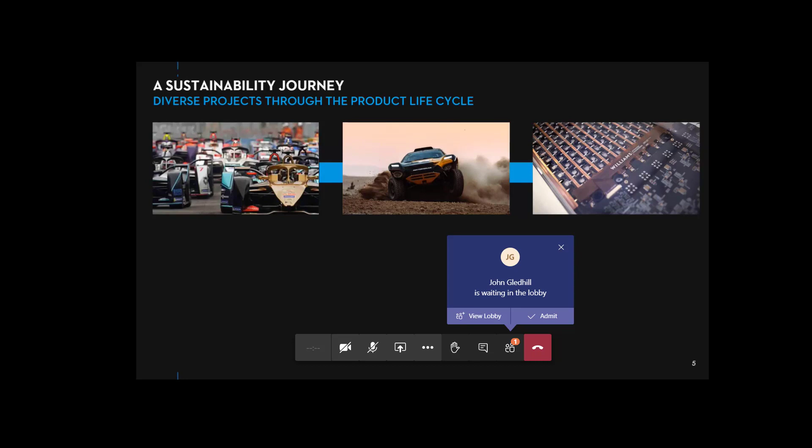We are also diversifying the battery systems into other markets. A couple of these being the Anglo-American mining product and also ocean-faring yachts. The battery pack in the mining product is well over 1,000 kilowatt hours in size for this fuel cell application.

Finally, reuse. Significant experience in repurposing automotive batteries. The example I'm showing here was a project that we did on the EU Horizon 2020 program, where we took Second Life Nissan Leaf batteries into a stationary energy storage application. Clearly, the charge and recharge requirements of an automotive battery far outweigh those for residential purposes, and therefore, once end of life in automotive battery usage happens, it can be utilised for future residential use.

So, sustainability. What does that really mean? We see that being used in many different factors, but it is fundamentally defined by the process of people maintaining change in a balanced environment in which the exploitation of resources, the direction of investments, the orientation of technology development, and the institutional change are all in harmony and enhance both current and future potential to meet human needs and aspirations.

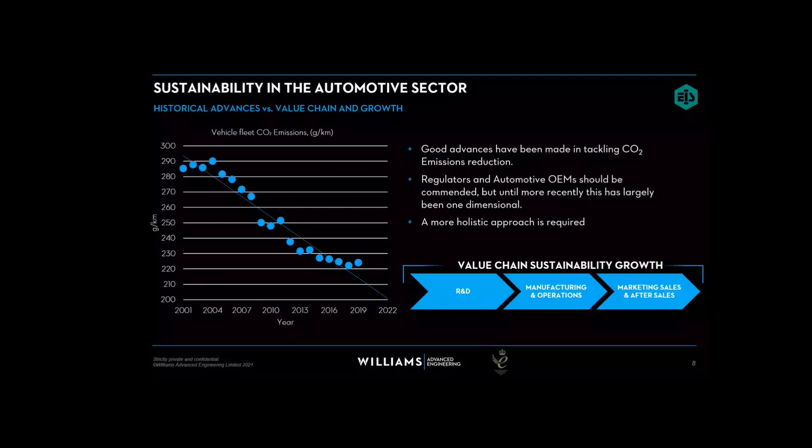So what's historically been happening? Well, I think historically the industry has generally been concentrating on tailpipe vehicle CO2 emissions. The chart shown is from the US EPA, and Europe is clearly a little bit better, but what I really wanted to illustrate here is that the industry has made some excellent advances in this time. However, to truly impact sustainability, a far more holistic approach is required. The whole value chain needs to be analysed to enable that sustainable growth across R&D, manufacturing operations, market, sales, and after sales.

So, at a high level, we can understand that there are many factors that contribute to sustainability within the automotive sector. It actually creates a circular economy that increases the overall value chain and growth. We should be mindful of any form of environmental impact on the resources that we utilise and minimise waste at any opportunity, whatever our function is within the automotive industry.

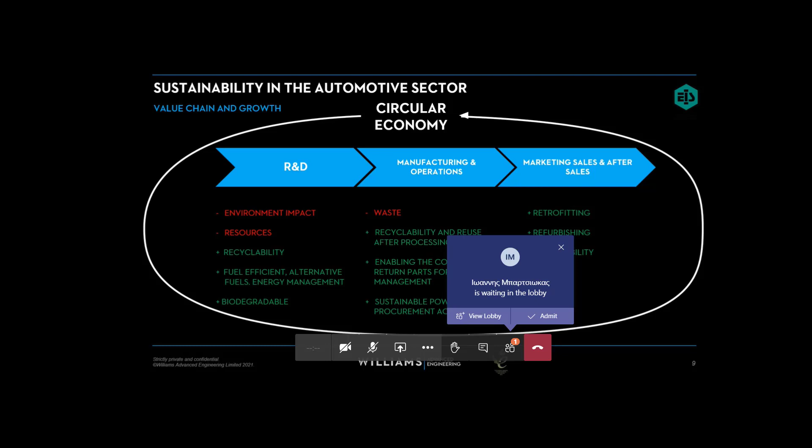Interestingly, I am fortunate enough to speak to a number of different OEMs, and I've seen a significant change in this mindset over the last 3 or 4 years. Some have been doing it for longer, but certainly in the last 3 or 4 years, there has been an acceleration in this approach.

Taking that top-down approach, there are already international standards for sustainable life cycle assessments. The question is, how does the automotive industry contribute across the design, materials, manufacturing, and use and end of life cycles? I've included a number of important midpoint factors to consider. This is just a mere snapshot. There are a huge amount more.

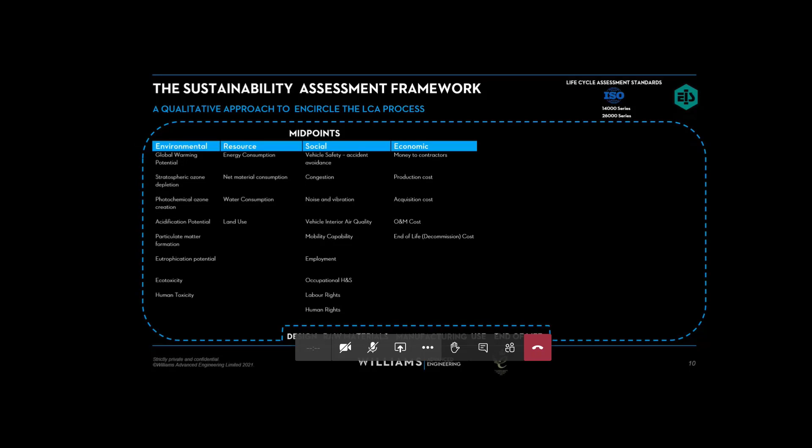The endpoints are clearly the outputs of any of our actions. The environmental, social, and economic benefits will be significant. One of the key things to note here, and I'll touch on this a little later, is the cross-pollination of our actions as engineers. If we design for one dimension only, it will always almost have a negative impact on another.

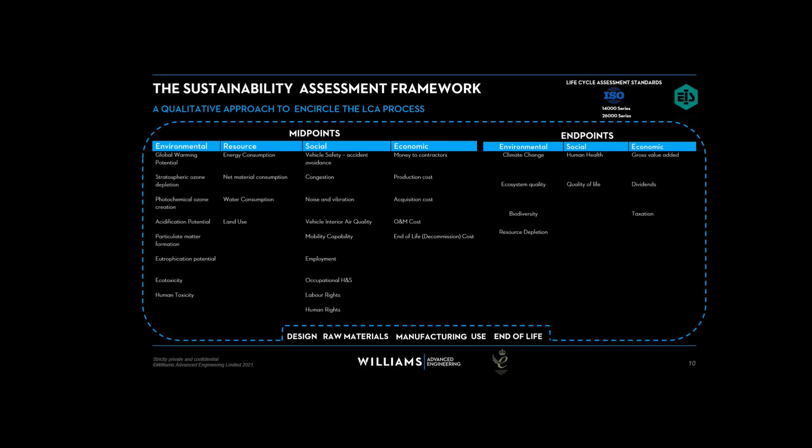So what is the industry doing? Well, if we look at the Advanced Propulsion Centre's technology roadmap for lightweight vehicle and powertrain structures, you can see a more holistic qualitative consideration being applied. Whether we are looking at design-led, materials-led, or manufacturing process-led, the considerations for sustainable life cycle analysis across those areas is being considered, rather than the historical cost, performance, and durability.

One thing to note, I'm not going to go into the detail of each one of these areas, but if you're not already utilising the excellent roadmaps from the Advanced Propulsion Centre or the Automotive Council, I recommend that you do go there because they are an excellent resource.

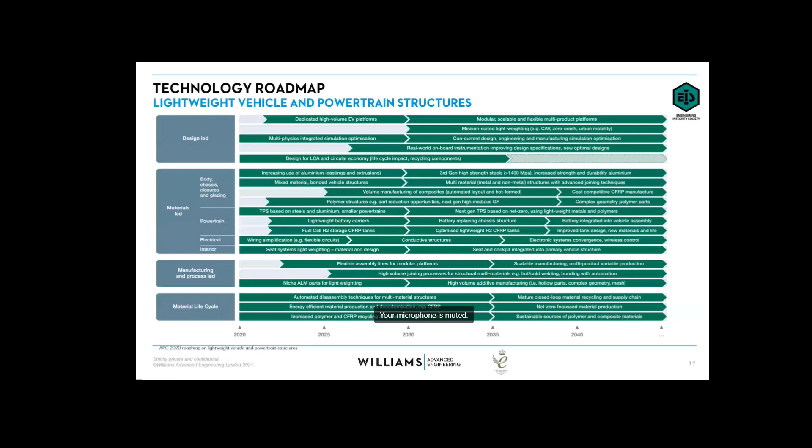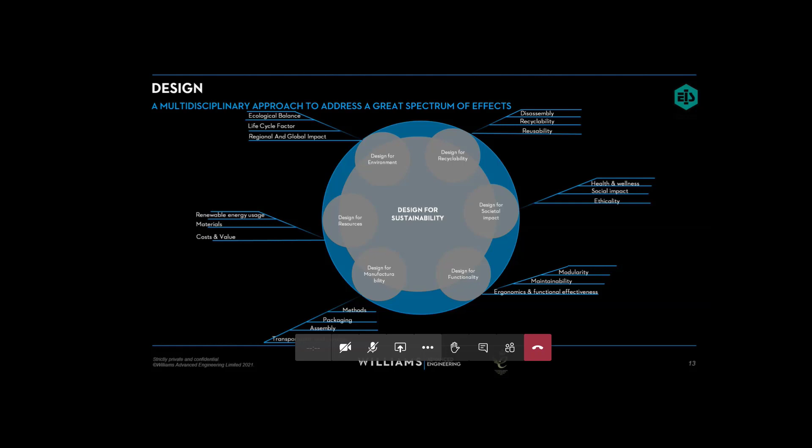So, some considerations for this holistic design for sustainability. As I mentioned, it is not just looking at those traditional cost, performance, reliability elements that engineers would historically design for. There needs to be a consideration across all of the main factors, not only from an environmental perspective, recyclability, social, functionality, manufacturing, and resources. As I mentioned, they are all intertwined and very important in terms of getting that right balance. As I mentioned before, most OEMs are starting to take this into account, and I'll touch on that a little bit later on.

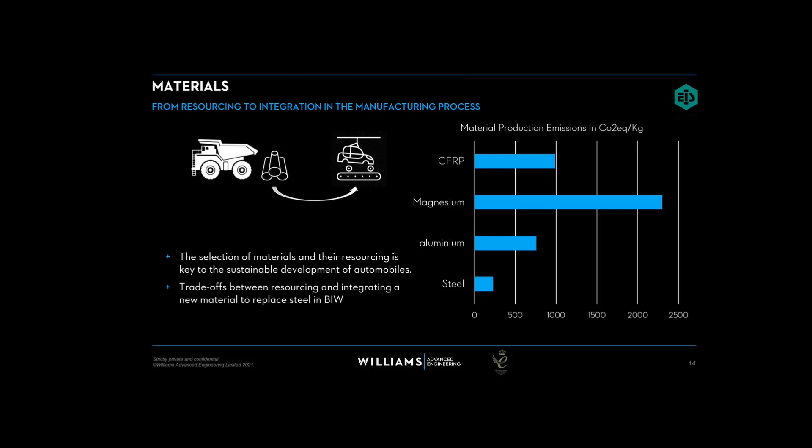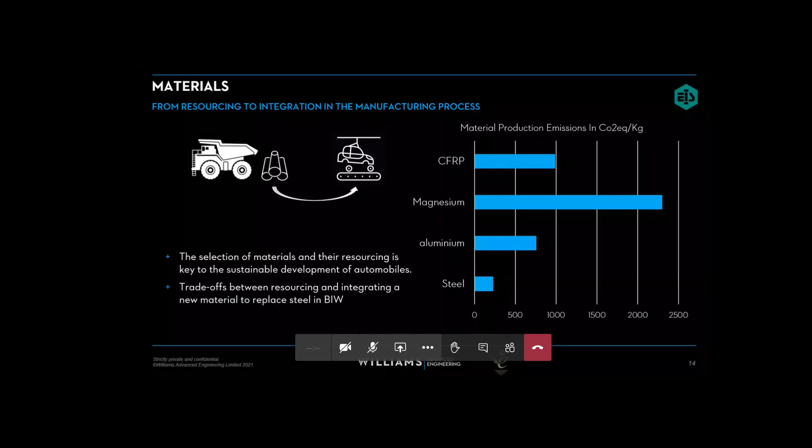So if we think about materials and materials alone, clearly the selection of materials and their resourcing is key to that sustainable development of automotive products. Still, at this moment in time, if we think about the equivalent CO2 per kilo, steel is still far and away the best solution. However, those things are changing, and as composites and mixed material technology advances, there is an expectation that this will change, and the trade-offs are required not only from a material production perspective, but also the use case. So clearly, CFRP, aluminium, magnesium have other benefits in use case.

So powertrain has a historical direct link to sustainability, but we have come a long way since I remember a well-known UK car manufacturer having one engineer dedicated to fuel consumption benefits in 2001. Still only have 7.4% alternative fuel, including EV and base technologies, registrations in 2019 - 1.6% BEV or fuel cell - but that is expected to rise.

Whenever this is discussed from a powertrain perspective, well-to-tank, tank-to-wheel is always being considered. And this is clearly a contentious topic when we think about greenhouse gas.

One of the key points to note, and I think this is important, when the government is keen to push electric vehicles, when you are starting to utilise renewable energy sources for electric vehicles and energy generation, the electric makes more and more sense. The current EU mix for energy creation is suggesting that we are still better over a life cycle greenhouse gas basis than the comparable diesel and gasoline products.

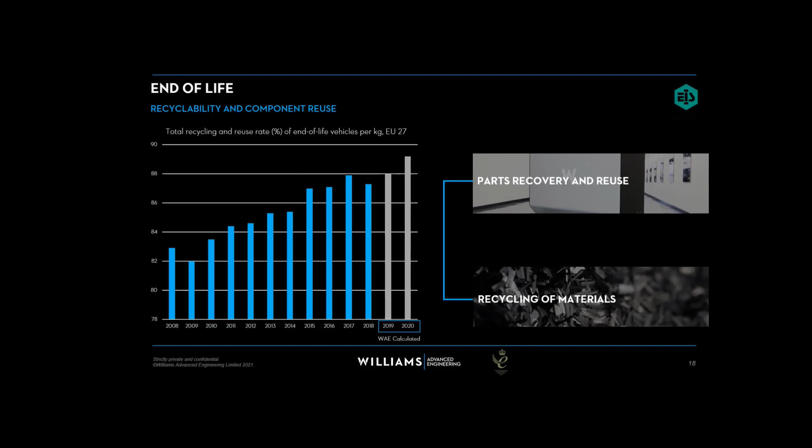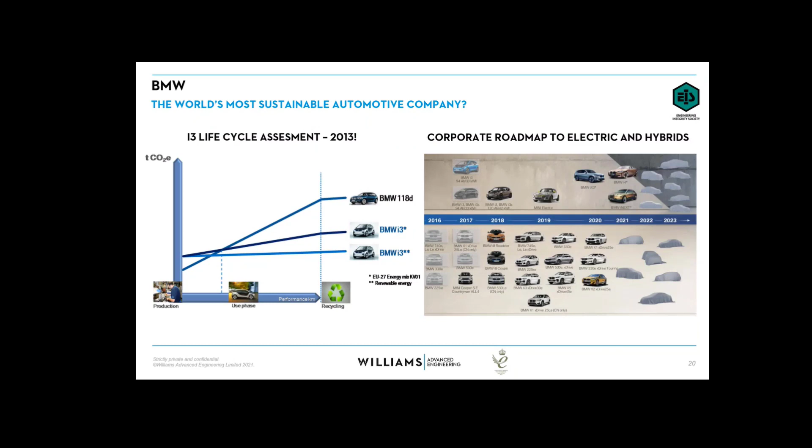Considering that the planning for that vehicle had probably gone on since 2008, the foresight that they have had over and above a lot of other OEMs clearly indicates that it's been at the forefront of their sustainability criteria moving forward. Even then, as we can see, the messages of renewable energy being utilised for the electricity generation makes a massive difference to the life cycle assessment of the i3. They clearly have a good rollout plan as well for continuing hybridization and electric vehicles.

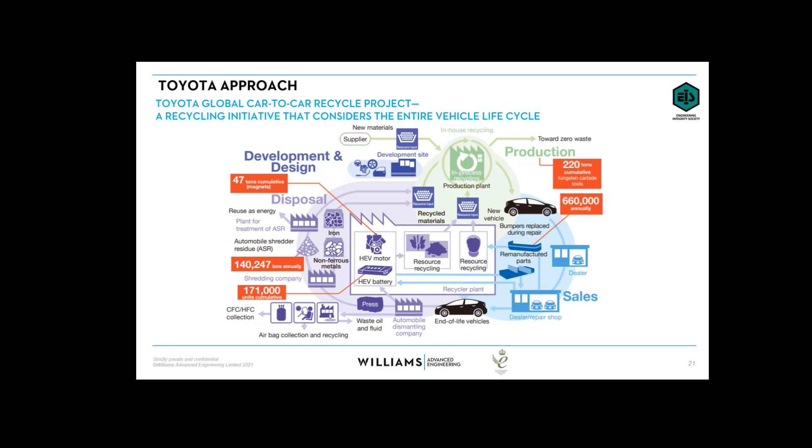The organisation I used to work for, over 10 years ago, had a house on site specifically set up to allow sustainability to be considered across not only the use from an automotive perspective, but the reuse of energy and battery systems.

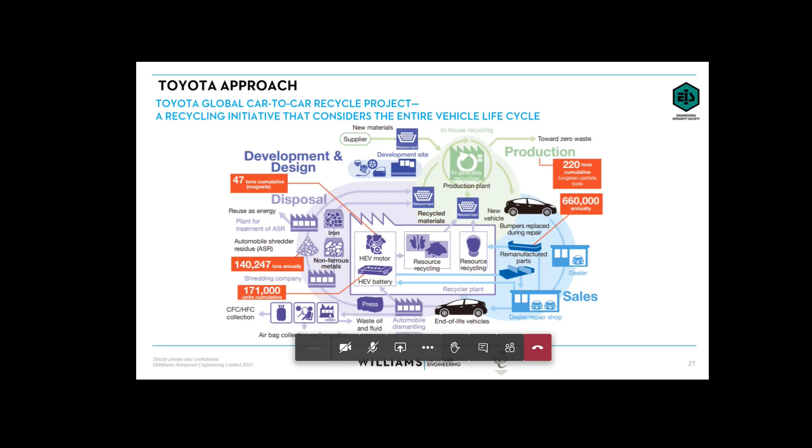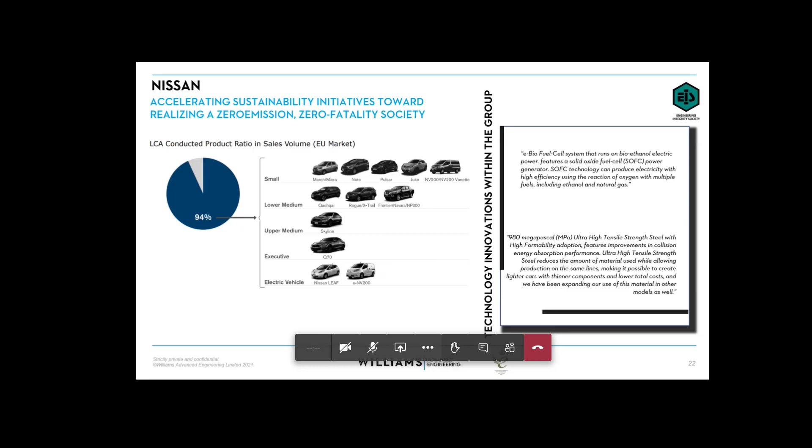Nissan as well are considering life cycle assessments throughout the majority of their product range, as well as other technology developments. Clearly, maybe slightly behind an organisation like BMW, but it's clear that all of these organisations are considering life cycle assessment as part of their sustainability portfolio, and it's a given now from a marketing perspective that this is required for a large OEM.

So, what is the WA sustainability approach? Three key areas connected to our core competencies: energy efficient performance, aerodynamic thermo simulation capability, fundamentally improving the performance and efficiency of any given product.

The energy systems and technologies, so capturing, controlling, storing and deploying energy, and where possible, designing for reuse. Lightweight structures, high performance composite and metallic technologies that not only give the right performance during use, but can be recycled or reused downstream.

Aerodynamics and thermal management. If we're thinking about EV vehicles, the historical benefits of aerodynamics are clearly well known, and the benefits of fuel consumption or energy consumption have been around for decades. What is more and more important is the improved thermal management for electric vehicles - the increase of a vehicle's range by minimizing losses, but also the optimization and the vehicle range trade-off from passenger comfort and vehicle range across the ambient conditions.

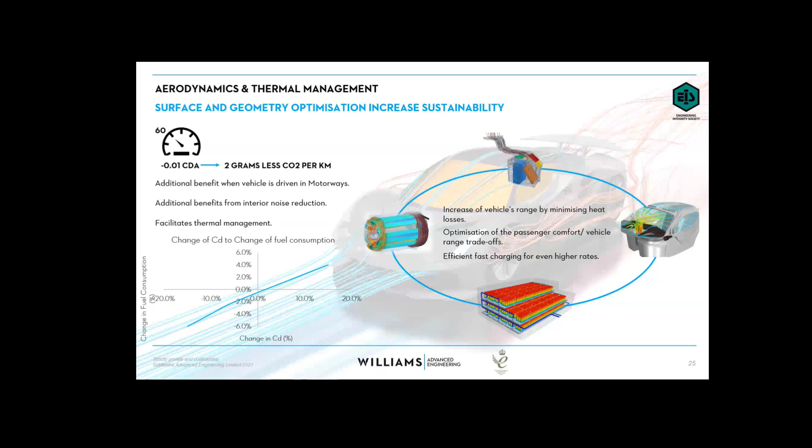And efficient fast charging as well. So challenging the technology limitations across cell, pack and end of life. Ultimately, we take an approach to characterize and model as well as possible at a cellular level to ensure that we are maximizing the benefit at a cell-by-cell capability and a consistency across that cell.

Maximizing the cell-to-pack ratio, providing the highest pack energy as much as possible from a packaging space, but also from a lightweighting point of view.

And more importantly, especially as we move to more of a mobility as a service type of social requirements, control algorithms that will improve the health of the battery system and take a condition-based maintenance approach to keep the life of the pack and the battery systems as long as possible.

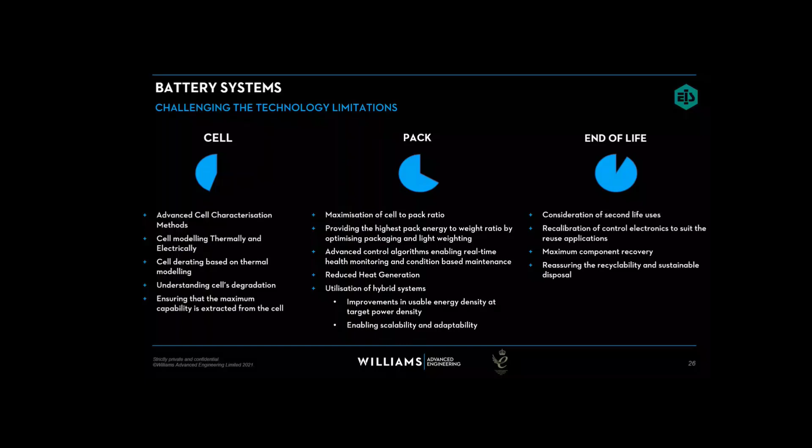Considering multi-cell chemistry approaches, ensuring that product can be as scalable and as adaptable as possible. An important element that has been considered over the last couple of years is consideration for second life uses at the conception of the design of the original use, making sure that the algorithms are in place to understand and maximize the benefits downstream. On top of that, as a given, recyclability and sustainable disposal of any sort of material or componentry.

Lightweighting. Our philosophy is that there is a paradigm shift that will come over time when we consider mixed materials as much as possible. Utilizing mixed materials gives the best benefit of mass and recyclability. There is the ability of having integrated systems for lightweight structures with our systems engineering and integration approach that should allow better packaging and a reduction in mass.

Additionally, we have some novel composite manufacturing processes that allow the ability to utilize recyclable materials, as well as reducing the process time for the manufacturing of those composites.

In summary, the journey the automotive industry has taken over the past few years has been positive. The industry is taking a more holistic life cycle analysis approach to sustainability, and despite the current disruptions in our lives, it is a very exciting time to be involved in this shift in the industry. Thank you very much for your time. I look forward to your questions.

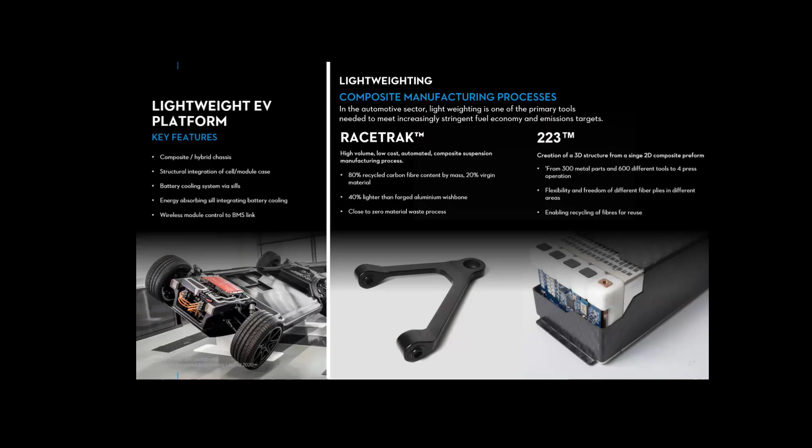Thank you very much, Dyrr. That gave me a lot to think of, and a lot of... It was really interesting to hear what's going on within the industry, what's going on within manufacturers and designers.

Hi there, thanks for your presentation. It was really interesting to see how Williams is getting involved in this and what the general landscape looks like. At the moment I work in the aerospace industry, and we've noticed the general trend seems to be that there's not going to be one size fits all technology. Do you think the automotive industry is heading down a route of no return with EVs, or do alternative technologies like hydrogen, flywheel storage, etc., still have a place for heavier duty vehicles, or are we set on an almost direct path now?

I think there are alternatives. I think flywheel storage, generally speaking, has probably had its day to a certain extent - I'll be glad to be corrected on that - but that was generally utilised because battery technology wasn't where it needed to be. Williams had a business for flywheel storage; we sold that about 7 years ago, because battery technology had actually moved forward.

As I mentioned during the slide, one size doesn't necessarily fit all. But I think the key point is we are advancing battery technology, and whether you're talking about hydrogen fuel cell, that still requires battery technology to support it, or any fuel cell technology. The key thing for us, and the mindset I'm in, and I'm sure governments across the world are thinking like this, is that renewables for energy is the driver.

Once you can get renewables to be a significant percentage of generation, and we don't have to rely on things like coal and natural gas, that will allow us to utilise electric vehicles more and more. But alternative fuels need to be considered, biofuels need to be considered.

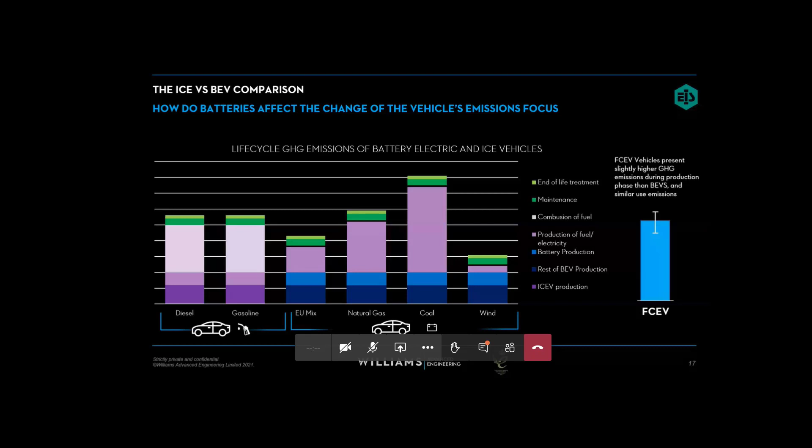Without question, and that's the trade-off that needs to be considered. I mentioned around that message, that there is that trade-off. Clearly, from a materials production perspective, there is an impact. But when you then consider the benefits of mass of some of the other materials I mentioned, there's clearly performance benefits, and it's getting that right in terms of sustainability versus cost versus performance that we were considering.

One of the things that we are looking at significantly at WAE is the opportunity for more mixed materials, non-steel, but aluminium, composite materials, which not only utilize recycled materials, but we're trying to reduce the time to manufacture from a composite perspective. That's one of the key things that has historically restricted composite use as well.

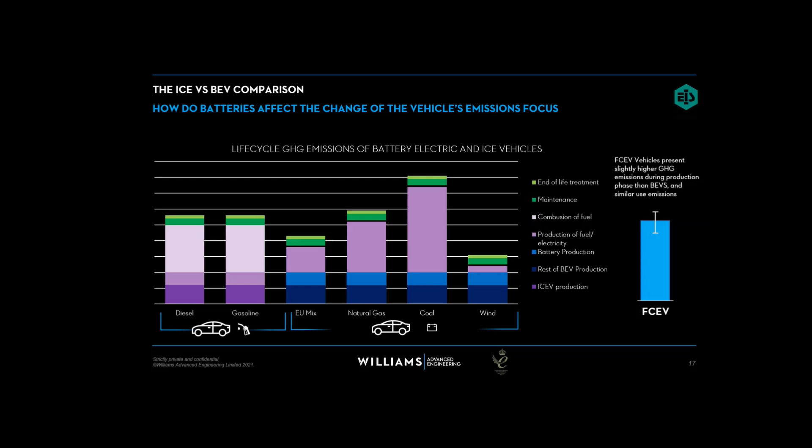Our next presenter, who is Jonathan Sewell, who comes to us from Millbrook Proving Ground. He has been working within the industry, working within motorsport, motorcycle engineering and the like. Jonathan has had a career within the academic area, working in universities, primarily Coventry University, as a researcher and a lecturer. Jonathan's also worked with the Centre for Advanced Low Carbon Propulsion, working on thermal management of battery cells, modules and packs. So similar to some of what Dyrr was talking about, with thermal management becoming much more important as things are changing within the world of batteries.

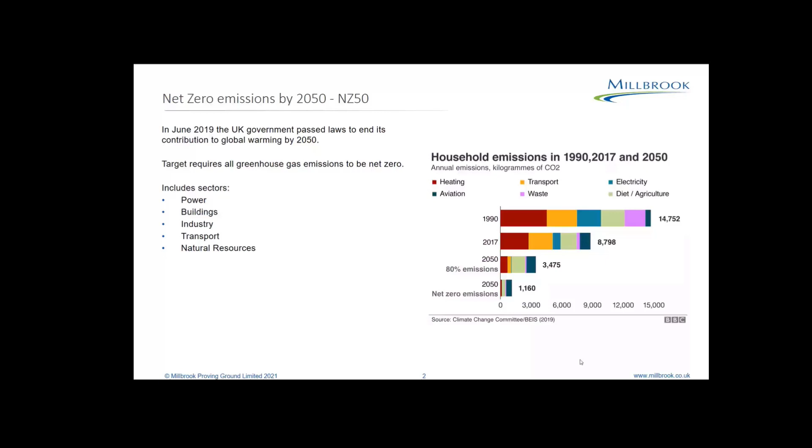And then we've got transport, which is what I'm going to look at the safety considerations of. What is the government's plan for the transport industry? They've got this Road to Zero plan, which states that they're planning for the end of conventional petrol and diesel cars and vans by around 2040. You may have heard there's some push to bring that forward 5 to 10 years.

The government's also planning to remove all conventional vehicles by around 2050. So this is quite a huge push, considering that the majority of vehicles on the road at this point in time are conventional vehicles, petrol and diesel vehicles.

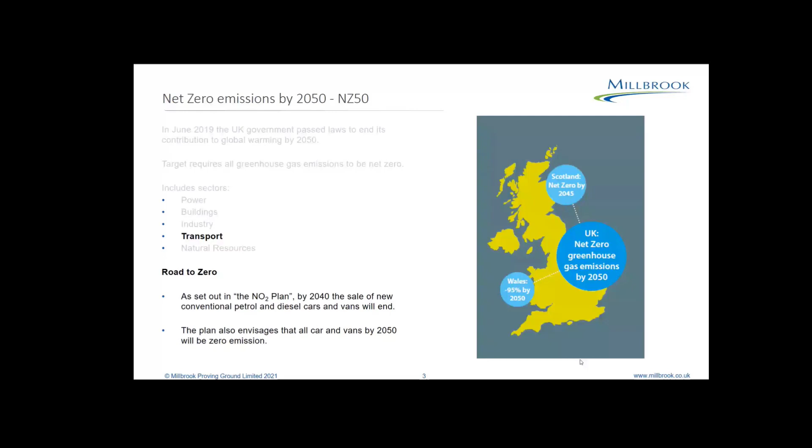Are electric vehicles new? The short answer is no. Between 1890 and 1910, there were a number of hybrid vehicles and pure electric cars. By 1915, most vehicles being produced were gasoline or petrol-based. So there was a shift then.

Is it just the UK driving for low or zero emission vehicles? It won't come as a surprise that this isn't the case. Interestingly, China and South Korea are taking a different approach by pushing hydrogen as the future fuel. China want to have 1 million fuel cell vehicles by 2030 on the road, and as of 2019 they only had just shy of 2,000 vehicles on the road.

South Korea have plans by 2025 to have 200,000 hydrogen vehicles on the roads, so there's going to be a huge push. This presentation, as my get out of jail free card, isn't going to go into the pros and cons of hydrogen versus battery electric vehicles.

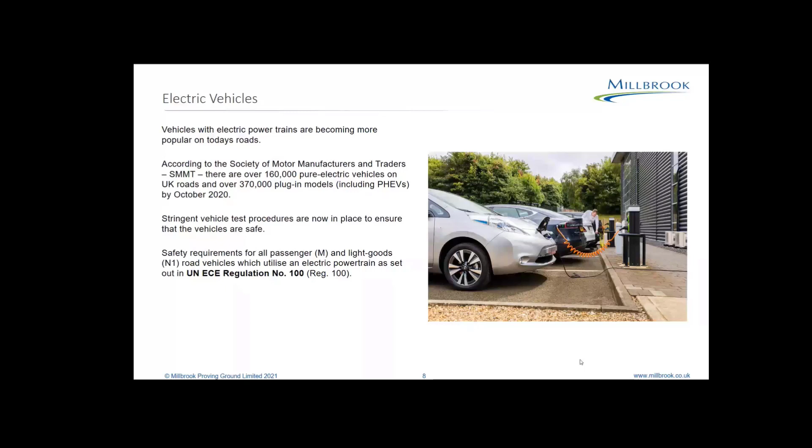As part of Reg 100, there are two parts to it. The first part is about electrical safety, and that covers these 4 items and others: protection against direct contact, protection against indirect contact, isolation resistance, and functional safety. Functional safety basically means that if you leave your vehicle in drive and open the door, the vehicle has to give you either an audible or optical warning that it's still in drive.

So what am I looking at with this one? Well, protection against direct contact. Why do we need this? OEMs don't want their customers to be going around and getting themselves electrocuted - it wouldn't be a particularly good news story for them. Part of the criteria is for them to check all electrical connectors for compliance, all the high voltage electrical connectors. The high voltage side of the vehicle can be above 30 volts AC RMS and 60 volts DC. We're seeing battery packs creeping up towards 4 figures nowadays in some vehicles, so getting up to about 1,000 volts DC. So we don't want consumers, the general public, even engineers, to actually be able to get in contact with a live high voltage energy storage device.

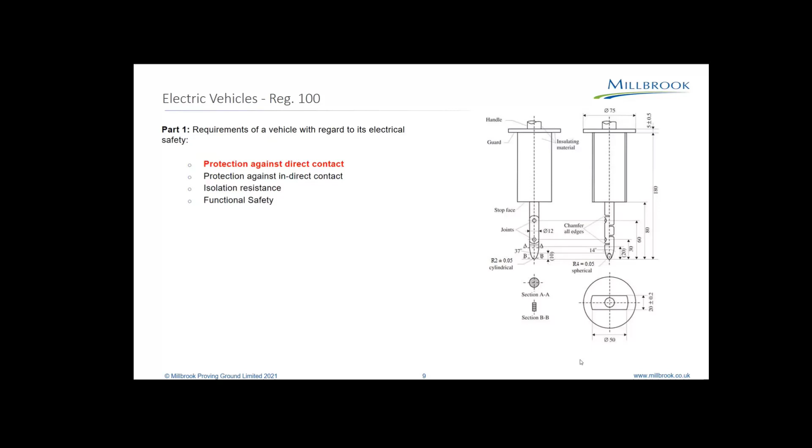Another example is the isolation resistance test. The HV electrical circuit doesn't ground to the vehicle chassis, it's isolated from the chassis. This prevents the chassis from carrying high voltage, or potentially fatal voltages, from the energy storage system, which means the user should not be able to get themselves in contact with this high voltage system on a vehicle. The isolation test checks the isolation resistance between the high voltage system and the vehicle chassis. If there is a presence detected, it doesn't necessarily mean a complete fail, but it needs to be within certain realms.

Fuel cell vehicles have a slightly different regulation to battery electric vehicles or hybrid vehicles, because a hydrogen fuel cell tends to produce water anyway, so it gives a slightly different resistance across, but it gives you an idea.

Part 2 of Reg 100 is looking at the energy storage system. So this is to do with mainly the battery packs, either as cells, modules, or packs themselves.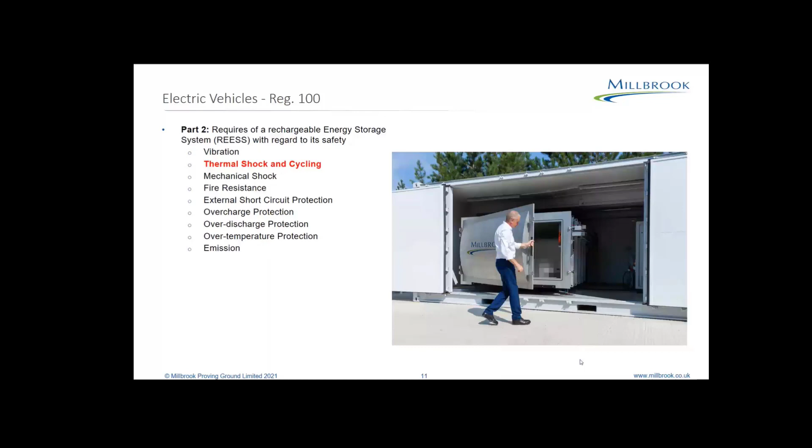We then have, again I'm not going to go through every single one of these, I've just got a selection of 3. We've got mechanical shock.

What is mechanical shock? It's to simulate a harsh deceleration or acceleration, simulating a possible collision in the vehicle. So you've got high accelerations when you crash, or when the vehicle is actually physically crashed.

We basically shoot the battery pack down our sled while having all the monitoring on, and then it's basically a pass and fail criteria of which it needs to pass, or hopefully does pass.

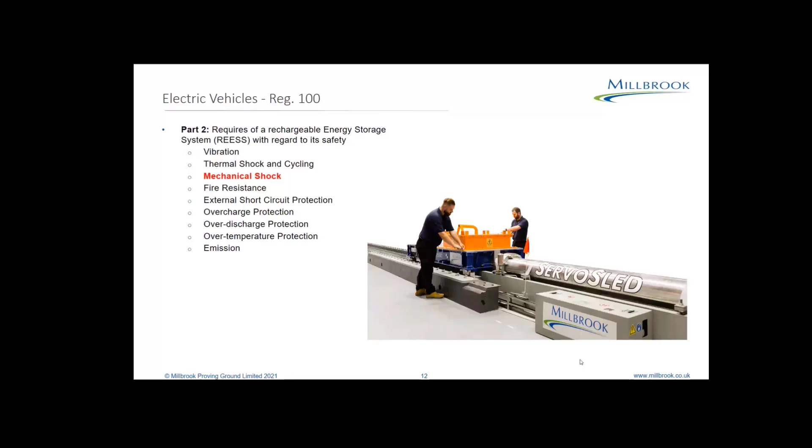We then have - some people see it as the more exciting side of things because it includes fire. It's quite a strange test, to be honest, especially when we're doing a drive for zero emissions.

This test involves basically burning petrol, and the test is to replicate a crash between a conventional vehicle and an electric vehicle. The petrol vehicle's fuel is actually on the floor underneath the electric vehicle and it ignites. What's going to happen to the battery pack?

The test includes 4 phases: igniting the fuel, allowing it to preheat if the fuel is less than 20 degrees Celsius, then the flames are put - or the battery pack is placed above the naked flames - and the battery pack's left there for 70 seconds.

After this 70 seconds, it can either continue for another 60 seconds being exposed to the naked flame, or it can have an indirect exposure, basically a screen that slides across the flames.

Once this 2-minute and 10-second test has been completed, you've got the removal of the flame from the battery pack, and then we monitor the surface until it's ambient, or at least the pack is reducing in temperature, over a 3-hour period. The pass criteria for this test is the fact that there's no evidence of explosion.

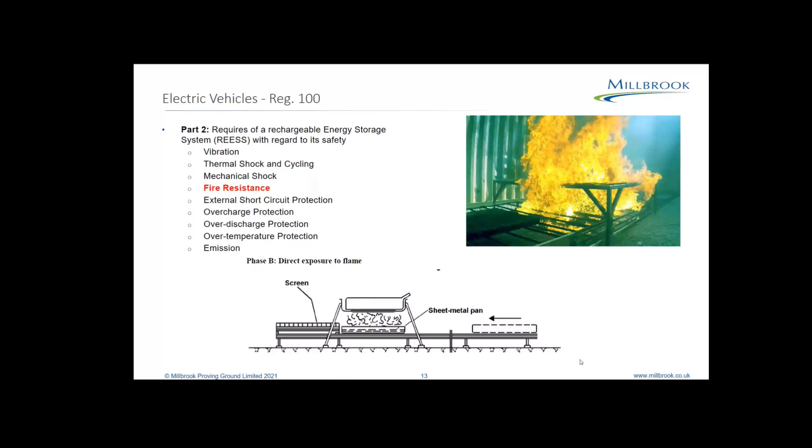So I spoke briefly about the fact that there's leakage, venting, fire, rupture and explosion. But there's got to be a classification of these outcomes from battery testing. One example used in Europe is the European Council for Automotive Research, which have produced this table that you can see here.

We've got one level lower, hazard level 6, which is no explosion but we've got flying parts of active mass. We tend to see this as the casing of the cells actually still intact, where the internals have basically been ruptured or shot out of the cell.

We've got flame as well, the next level down - so flame, when you can actually see fire or a flame coming from the cell itself. Venting, so this could be venting of gas, but the gas is not actually igniting. Leakage tends to be talking more about the actual electrolyte itself, as in a leakage you tend to actually see a fluid coming out.

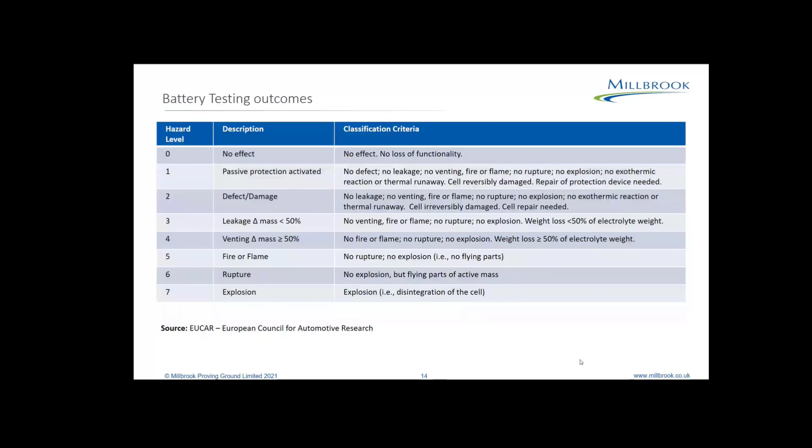Defect or damage which is irreversible, so the cell actually needs repair, or it's end of use for the cell. Then you've got passive protection activated—some cells have passive protection against some of the tests they're put up against, such as overcharge protection, where the protection device has failed, which it should do, but the cell itself is absolutely fine and can be reused.

We look at guidance from the HSE on how we can go about working on electric vehicles and batteries safely. They've identified 8 criteria, or 8 risks, associated with working on electric vehicles. Most people tend to have a fear of electrocution when it comes to electric vehicles, however that's only one of the 8 that HSE have identified. Other people have concern about electric fires, or recovery of damaged or crashed electric vehicles. That's all covered here, and it's not really electrocution that's the main problem, because we don't really see in everyday use of production vehicles anyone getting electrocuted.

We do see in the news, national or world news, that some electric vehicles have caught alight, and there have been issues being able to extinguish or manage these fires. Eventually they either burn themselves out, or can be controlled by the application of usually water, which is quite scary when you think about mixing lithium with water. But getting to the actual battery packs themselves is quite difficult in the case of a fire, so basically you're trying to keep the pack as cool as possible, or remove the heat from the pack—you're not really trying to extinguish the fire.

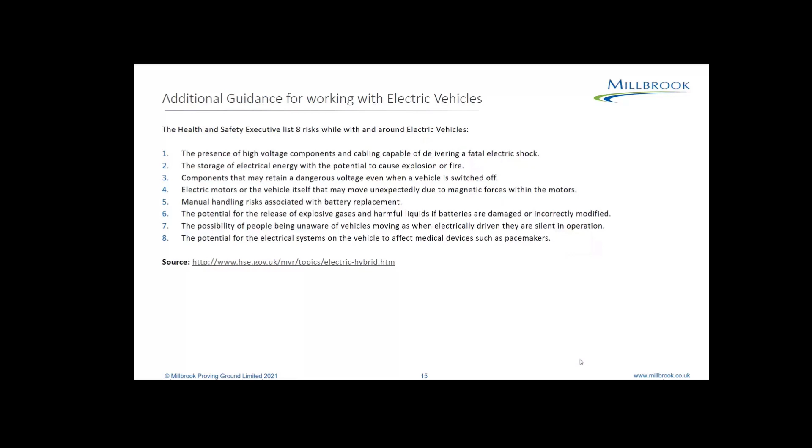So all in all, are electric vehicles dangerous? There's arguments both ways, but generally speaking they're no more dangerous than a conventional petrol or diesel vehicle. There should be no heightened concerns from the general public about electric vehicles. Electric vehicles are going to become the norm, be it correctly or incorrectly, the best option or not—that's not for me to say. And being the automotive industry, they react so quickly to changes in legislation or ideas.

If we look at one stat, a UK stat for the call-outs for the London Fire Brigade, which attended just shy of 2,000 vehicle fires in 2019. 54 of those were electric vehicle fires, and around 1,900 were conventional vehicle fires. When we look at those stats, they don't really give much information on the cause of the fires, but it's assumed that a lot of these vehicle fires, especially in London, were actually due to arson rather than the vehicles failing.